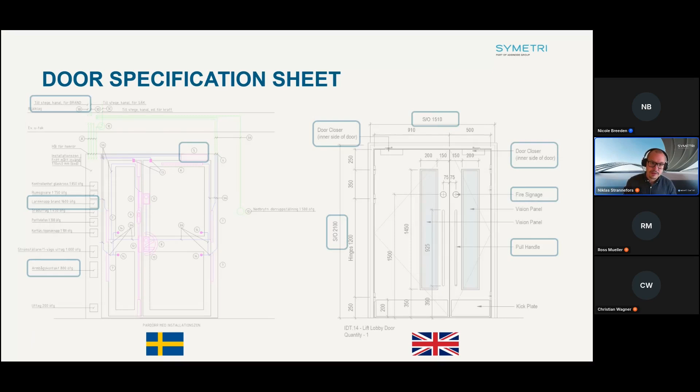These drawings we see in front of you are accompanied by explanations covering everything. What we can see is that when we think of fire safety, we don't realize how many parameters, how many lines on these sheets, are actually affected. Everything from the simplest, fire resistance, to material, reaction to fire, frame materials, panel materials, what kind of door fitting, whether there's a door magnet connected to a smoke detection or fire alarm system, what kind of locks, latches, handles, etc.

We create these drawings accompanied by a long schedule of all the doors within our project where we enter this data. Each door is quite specific, and there are a lot of parameters we need to enter and make sure are correct just around fire. And as architects, that's not the only thing we need to keep an eye on. Now we've got sustainability, environmental data, acoustics, security, accessibility, and of course design.

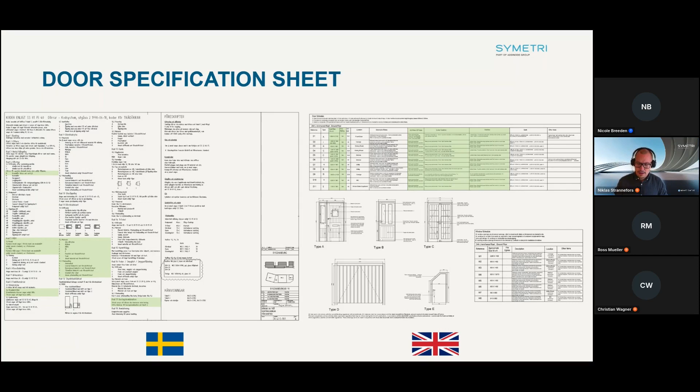I highlighted here all the parameters that you can find a requirement for within the fire strategy documentation. These are affected by fire safety. In this specific project, historically there was just one parameter called fire requirement or fire rating requirement, something like that. How can we make sure all these parameters are actually compliant with the strategy documentation? I counted it, and I might have miscounted, but it was 20 parameters in the Swedish one, and 35 in the UK one.

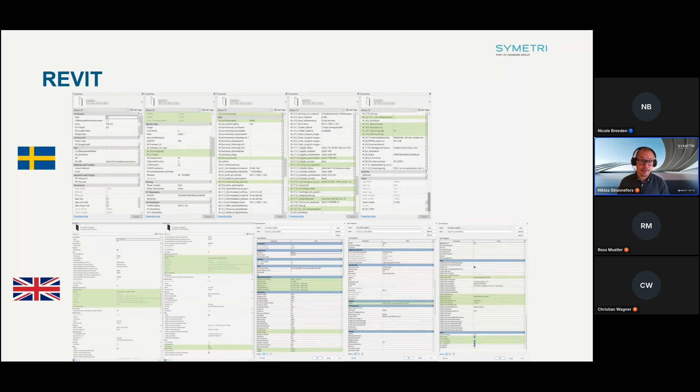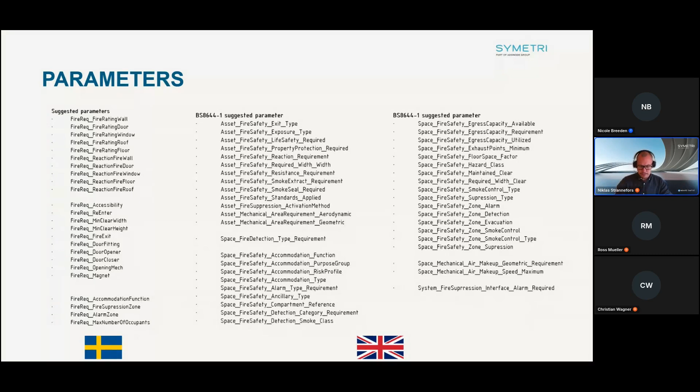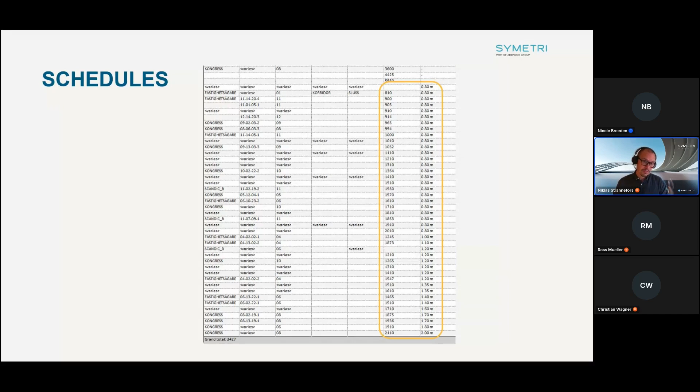Once again, if the fire engineers create their own model, they shouldn't go into your models, they create their own models. We have no requirements whatsoever on the architect model, meaning the only requirement is that you design as you do today. A door is a door, a wall is a wall, a window is a window. We're happy, just follow the categories and we're perfectly fine with that. Otherwise, we don't have any requirements. They can just place it, Christian will show later how it really looks like in real life.

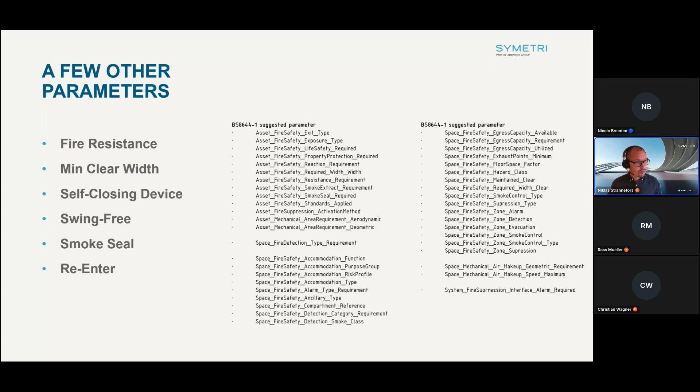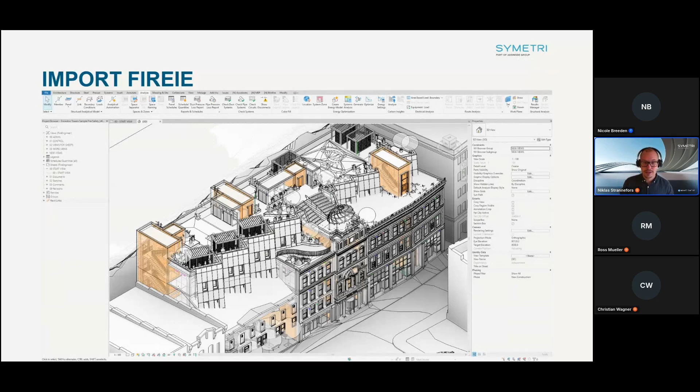But how would it look like as an architect in this project, and there would be a fire safety model? It's very simple, and it's very important for us, for you guys consuming the data, that it's as fast and simple as possible. So you can see that I already linked something, it's visible with fire data. I will play this video and go through it.

What will happen in the beginning is that the fire safety engineer can send you, if you don't have the parameters, a schedule which they save out from their model. They will save that, which you can load from Insert. You load those parameters and they will automatically come into your model, mapped to the correct category and shared parameters. So with just a few clicks, you will get, in this case, a bunch of parameters - I think it's like 8 or 9 on doors.

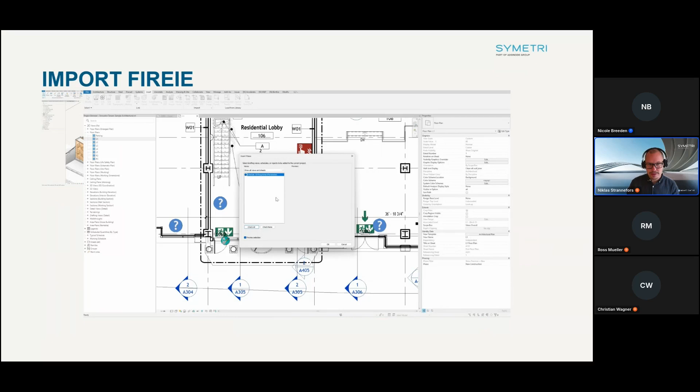You will see that you can go and download a free plugin from our Naviate.com webpage, called Import from Link. Here, you just select the fire safety model and press import whenever you feel like it. That will pull the data from that file onto the components that are yours and nothing else. So if they have added parameters to their structural or mechanical models, it doesn't affect you at all. It will actually start populating that object with those requirements. I'll just run this through again, it's quite fast.

Might even skip here. Perfect. I will pause for a second. But as you can see, all those parameters that were loaded are actually now populated. That easy it is. Now going to a schedule and start just comparing for those compliance checks. Once again, this is just fire.

Theoretically, you could have any kind of specialist model and start populating this information. Very simple. You have full control which parameters you want to bring in, which parameters you want to populate, and when. You have full control. The fire engineers have full control. You decide. But once we created these kind of models, we can take it to the next step.

And here I have the fortunate luck that my colleague Steve has made a video how you can start using this in ACC, both with design collaboration, of course, as a stakeholder, but as well within Build. So I'm going to share a video.

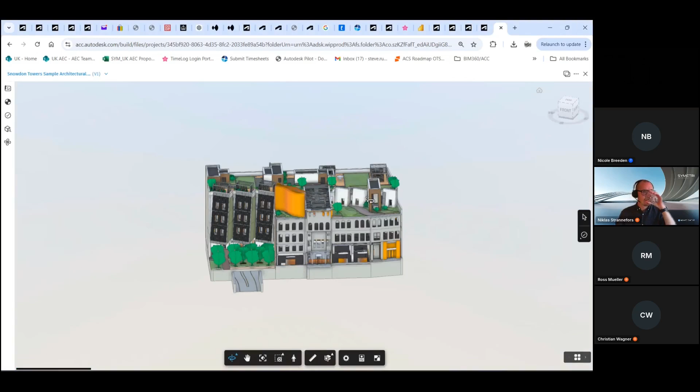So once the model's been generated in Bimfire, we can obviously bring it in to the Autodesk Construction Cloud. And this is where we can see the Revit file here generated by the architect. We can view it, we can start interrogating that data. We've got all the sectioning, so we can start seeing the detail and the fire stopping that's been placed into that model, etc.

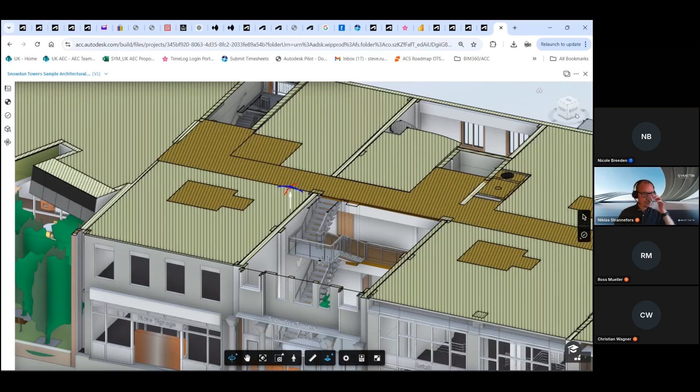So you can see the signage, making sure that everything is compliant in the way that we need it to do. But because we've got the fire data now in the model, what we can start doing is linking that into here and using it to more advantage during construction and handover. So in Build, we can go into Assets. Now what we can do with Assets is create categories. So builders works, fire signage, the walls, etc., can all be brought and managed within ACC.

But actually what's happening is I've brought the model in here. So this is the fire safety model that's created in Bimfire. I can bring that in, but I can actually edit mappings. And what that means is all those fire stopping penetrations and things that we've got, the builders works, can be mapped into the software. Same as the firewalls, fire signage, whatever else we've modeled in there.

And what I mean by doing this mapping is we can go into the model and start mapping to the categories that are in the model and start linking information. So this is data that's sat in the Bimfire model, but we can start linking that information into FIREie data and things of that. So we can really start making things intelligent, because we've got to get onto site and prove that we're building and installing this fire stop to regulations and capture the evidence around it. So we can start linking all that back in.

And once it's all brought into the system, they come in a list here. So if we wanted to look at all the builders works, that fire stopping, you can see here we've got the list now of all the fire stopping. Now if I click on one, you can see the data has now been populated, but it's coming from the model. And I've also got some of the FIREie data ready and prepared. But because it's linked to that model, I can still view the model here.

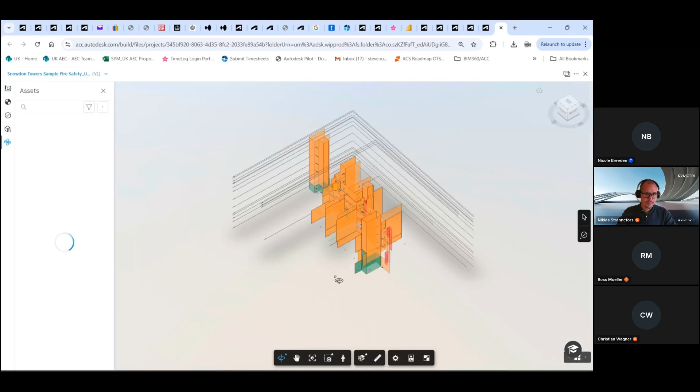It's starting now to filter that data, and it'll go straight to that wall penetration that had been modelled in Bimfire. And if I zoom out a little bit, you'll see that I've got penetrations all at different colours. That's because as I'm out on site on a phone or an iPad, I can use this to track exactly where that penetration is, whether it's been specified, delivered, installed, first fix, second fix, accepted. That's why they're all the different colours.

But we can take it one more as well, because we can use this to capture that FIREie data. So on a phone, we can go out, click a barcode and get to that penetration. Now we can start putting things like installed by, the ratings, installed date. So it might be today we've done that, etc. And you can see I can start capturing that FIREie data which is needed for the Building Safety Act.

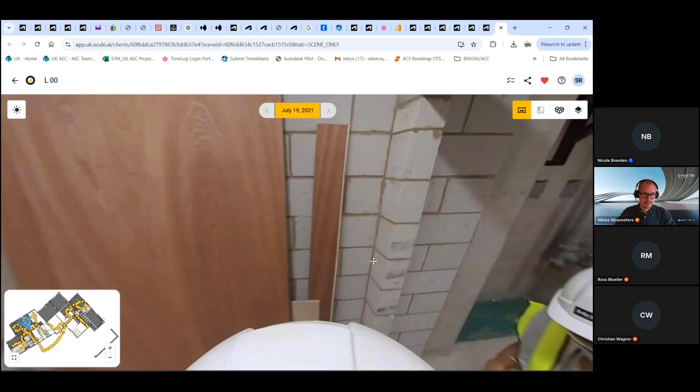We can take this one stage further as well. You can see I've got the penetration highlighted. If I hit this link, it'll take me off into Oculo. Oculo has seen the assets that are in ACC and brought them through into the system. So now there's the penetration. But what I can start doing now is tracking that penetration.

Every time I've walked around site, I can track it week by week to see what's actually happened with that penetration. As the extra bits have been fitted and the fire stopping is in place and closed out, we can track and monitor that through a 360 world. So you're capturing all the evidence we need within that system.

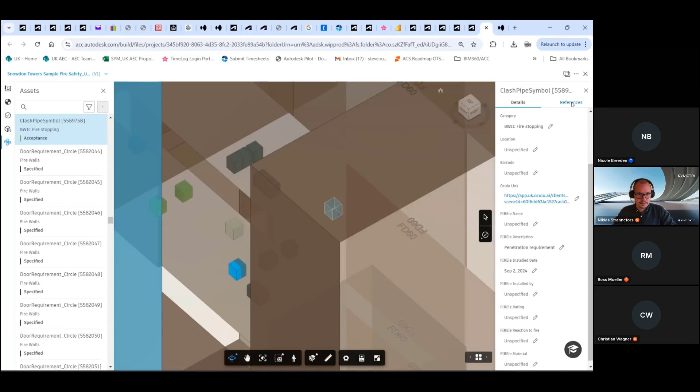Also, against that penetration, we could add a form. So we can add a checklist, and the checklist can be filled in to show compliance. So we've now got photographic evidence, forms, data, progress tracking, just because we've modelled it and been able to bring it through into the ACC system.

Here you can see actually how easy it is once we got the 3D model in place. We can actually start using it for a bunch of other things. And we can start tracking, getting this from design into a model with BIMfire, because everything that we can see as a parameter is actually an object.

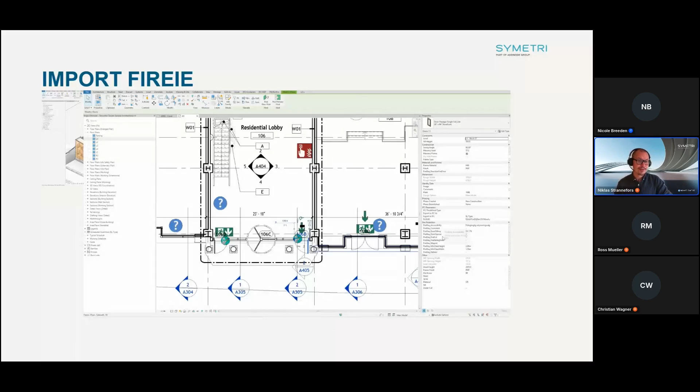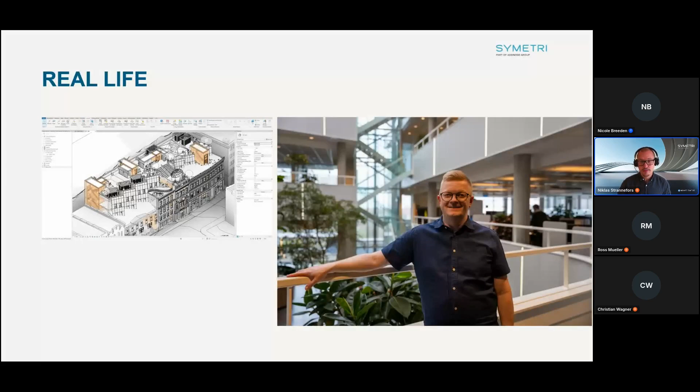But I'm not the one to tell you how this should work, even though I can. It's better for me to introduce Christian, who has been implementing this in Denmark. And I want to hand it over to him, and he will explain his journey going into a BIM world.

So I'm going to talk about how we use Naviate BIMfire here in Artelia Denmark, where I'm working. First of all, I'm Christian Wagner. I used to be a chef for 15 years, but decided not to do the cooking anymore. I wanted to do something different. So I took a bachelor in architectural technology, construction management. I've been working at Atelia for 2.5 years. The first year was as a student worker, and 1.5 years full-time now.

And when I started here, we did not use Naviate BIMfire. We didn't use anything. We were just Bluebeam 2D everything. But apparently I'm doing a good job, so they decided here in the spring to make me a technical lead on it because I've been working hard on it and I think it's fun.

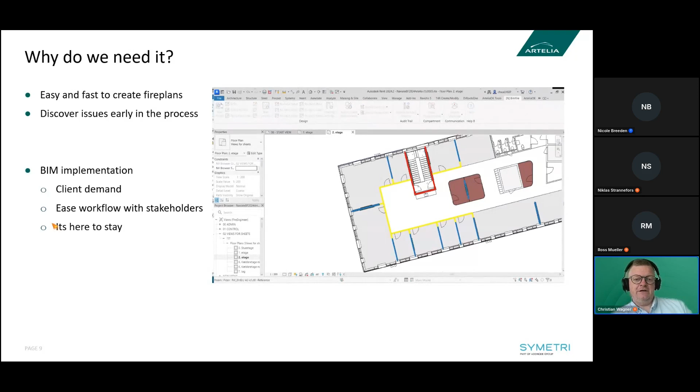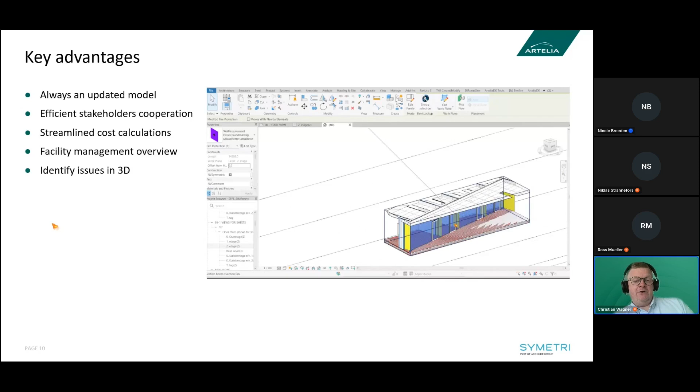What you can see here in the video is how easy it is to take a wall. You simply just click on the wall, and it's added the fire regulation code to it. It's very simple for us. As stated, you always have an updated model. Cooperation, very, very good. When you do it our way, it's also easy for cost to find out what do we need, how do we do it, because we have set the requirements for the walls, so they know this gypsum wall actually has a fire regulation demand on it, and this one doesn't. Facility management also likes it, because suddenly it's easy for them to see what requirement there is on all walls and doors in their 3D model.

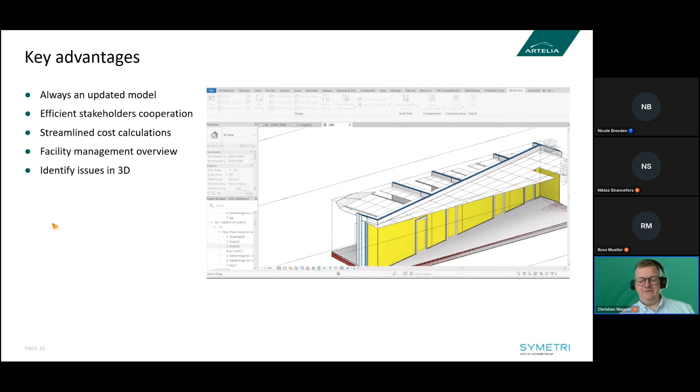And in Denmark, we have this yellow glass here. That means there's no fire demand on it, except you have to see through it. But everything else is a fire cell. And as you can see atop it, there's a small piece of wall. That one is almost always forgotten to put a fire demand on. It's a fire cell here in Denmark, so it has to have a 60-minute rating. And now it's easy for a constructor to see it. We'll show even more later on how that's done.

This is my very, very first time. When I came here as a student worker, I was given free hands to try and build my own 3D model, and I did. And I still use it, actually, because the project's not finished. It takes about 10, 15 minutes to open, so it's very heavy, even though it's not a complex building.

But what I found here is we have rescue openings in these round windows. And I was looking in the 3D model and said, there's something wrong here. We need to have a small bar to put the ladder up against when you're putting up a ladder. Otherwise, it's not up to regulations, and the opening has to have some dimension. They didn't have that.

So because I was sitting in 3D looking at this, we found the mistake, or it wasn't a mistake there, but it would have been if we were standing on site installing the windows and the guy said, can we check this box? No, we can't. Then you'd have to get all the windows out, retrofit them, or order brand new ones, and that would delay

the project by months, because in Denmark, to open a building, you need 2 signatures. It's the static engineer and it's the fire engineer. So it's critical that this is up to date, and they won't sign it if it's not up to date.

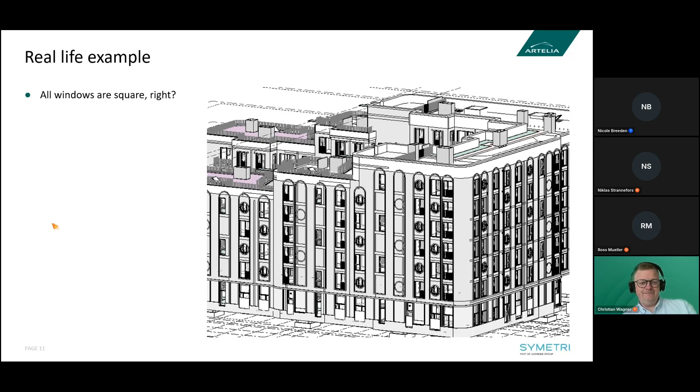Here comes the big thing. Architects, they like to change walls and dimensions and rooms and everything, and that's their job. So they have to do that. You have to optimize the design. But for us in fire safety, that can be hard. So here I just took a wall, deleted something, and extended the other wall so it's bigger.

And normally when this is done, you have the old PDF and the new PDF. You get a piece of paper from an architect saying, we changed this. But to make sure everything is found, we normally have to sit and check everything. And finding these mistakes, or not mistakes, changes can be hard.

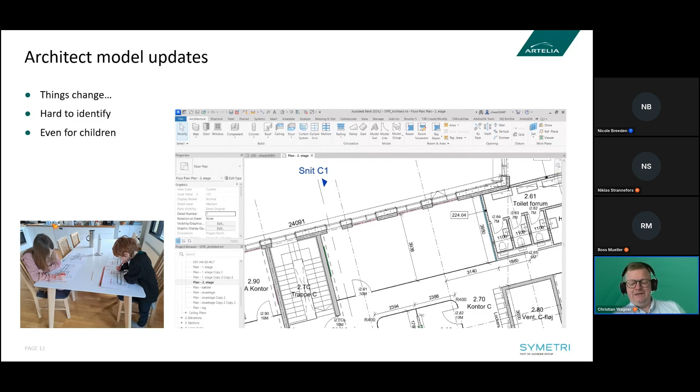So this is actually a colleague of mine. His children, they're given the new and the old drawing, and they sit and find differences, discrepancies on it, and see where they have changed something. It's not optimal, first of all, because the Saturday and Sunday morning is going by with this, and here in Artelia, we really don't endorse child labor, so we have to do something different.

So what you see now is here, you go in and you just put audit trail and see what's going to happen. And it states here that 2 walls have been deleted and 1 has been modified. And you say, okay. And suddenly you have colors on the wall saying that one has been deleted. So it's red. Then you delete it manually.

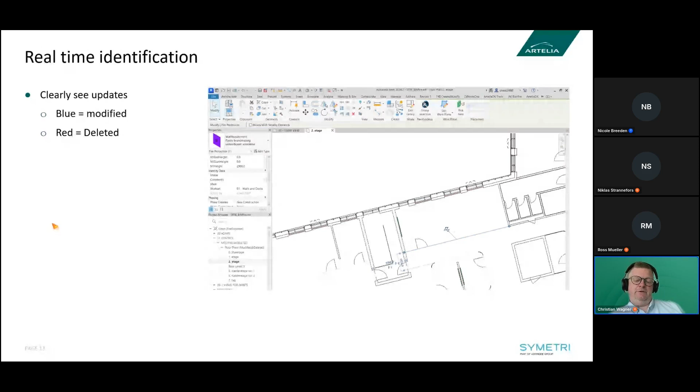The other one that's been changed, as I mentioned before, you just go in and you say resolve and accept it. And my model changes everything, and the wall is now grayed out because there are no discrepancies between my model and the architect models. Very, very simple. So that was the one way from the architects to me.

But sometimes I have a requirement going the other way or a note going the other way. And the way we found out how to do that best is I put a 3D comment box in, and I write what I have of demand or a requirement for this certain area. And on the right side, you see a sheet that I designed with Niklas, where everything is gray toned except this box that I put in, where I put in, this is what's going on. You have a requirement here, and there is a schedule on it.

So my comment is written in the schedule, and I just print these drawings once a week and send them to the architects saying, you have to be aware that this is going on here, and that eases their way to do it. They could also look into Dalux or into Revizto or whatever viewer you have, or look in emails and everything. But for me, I found this is the best way to do it. Visual communication. It's simple, it's fast, and it's working for us. So that's why we did it.

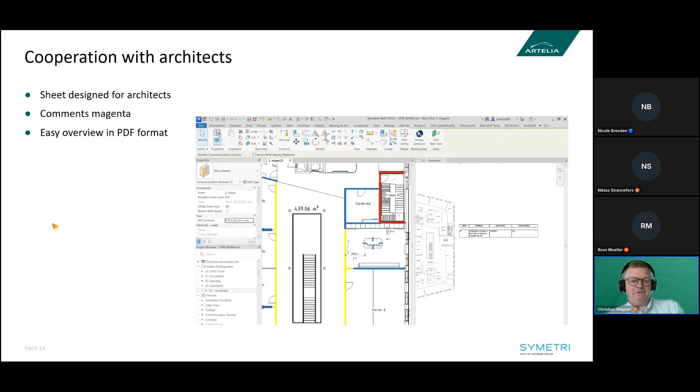Then the thing is, if you do 2D floor plans, you don't really take that much account of the floors. You're just writing in your manual and saying, oh, here we have this demand or this requirement. And in this project here, we had no requirements to the floors between two levels, ground floor and first floor. But if you have a fire cell there, then you do have a requirement. So I had to make sure that that was conveyed, and that could give some small discrepancies again and small challenges. And what I did here was to make sure that you get this small corner here as well from the first floor.

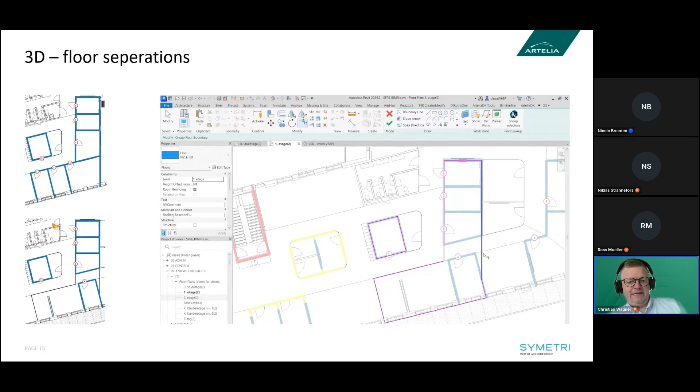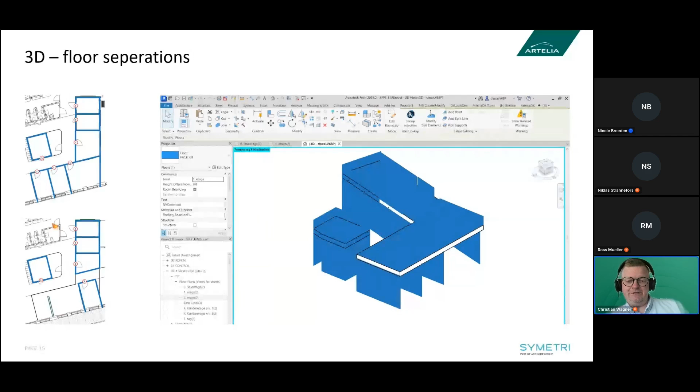And then in the end, you just click OK, and you can go into 3D, and you can see there it is. There is where you have requirements. And that's really important for the installation people, because if they place their duct in the corridor on the ground floor between the meeting rooms, suddenly they have a requirement in the ceiling. But if they move 2 meters out, there's no requirement. So they can save money by optimizing their design according to this model, instead of doing it safe and saying, oh, it's all a cell.

The big question my boss asked me was, are you going to spend more time on this? Is it going to be more expensive? And I said, yes, I will probably spend more time. First of all, they will get feedback more often if they want it. In Denmark, we have two hand-ins, and that's basically it. But we can do weekly, as we're doing on some of our projects now. So it's going to be more costly in fire engineers, but you can optimize your design, as I showed before.

So the other trades can spend less time on the project, and that's going to save them money. So overall, the project is going to save money. And here in Artelia, that's because we have all the disciplines in our place. There's no fighting. But of course, if you have one fire engineer, there can be challenges there. But for the project as a whole, it's going to be a good thing.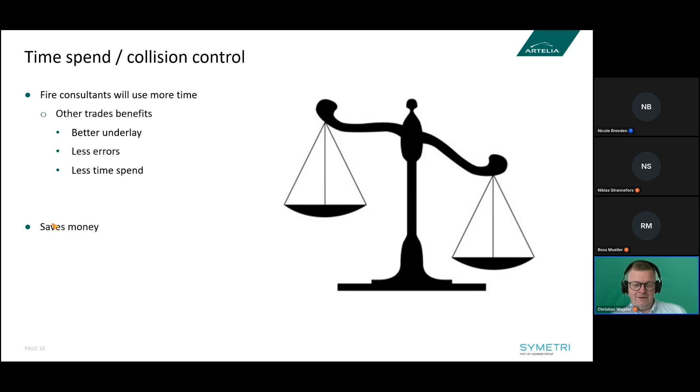And it's going to be a good thing for the architects as well, because you get an updated model and you have a better interface with your fire engineers. So you're not sitting at the end, having done everything, and suddenly you find out that you have a wall that's really a problem. So you need to do something about it, and then you have to go back and optimize the design and stop the building or whatever you're doing there. So this is a good way to do it.

Are there any challenges? Of course, there are challenges. ICT demands on the project have to be clarified as well. How do we talk to each other? And fire engineering in 3D is new. Doing BIM fire is new, but other people have done it before. So we have solved it by talking with other people. How do they work and do that?

Then, of course, there's the cooperation between architects and trades, because everybody has their own agenda. Architects have certain criteria that the room has to be functional. Fire engineers often don't have that. But again, with the communication we get, it's easier, it's better. So it's a challenge, but it's a challenge that's always been there, and this solves some of it. But of course, when you talk more to each other, you're also challenged that way.

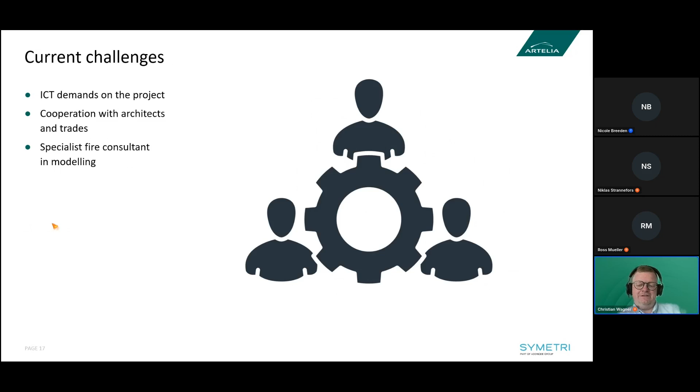Another thing you need is a specialist fire consultant in modeling. And as stated, I'd been working as a student worker for a year before I started using this on the project, and it's working. So it's not hard to use. You have a template, it's working. The interface is good. So for us, that's not really that hard.

And then, of course, we're going to collaborate with Naviate BIMfire in the future as well, because we see a benefit for us in getting this software up and running and getting it better and better. It's good, but of course, you can always improve stuff.